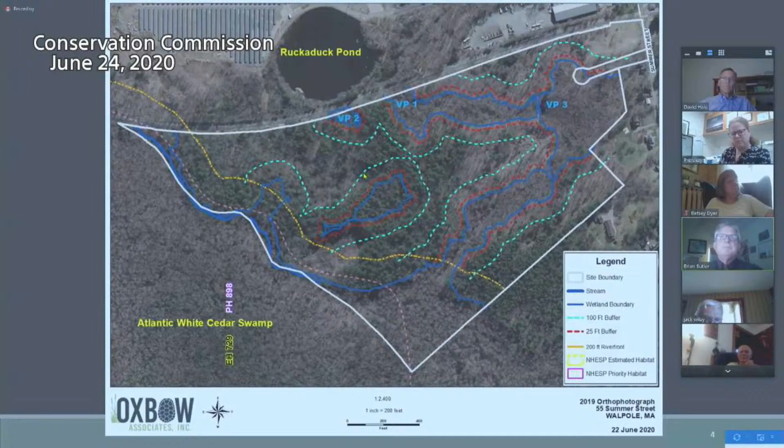The next two sheets are site plans. This was presented to the ZBA in the initial submittal, and you asked for the drawing box information—this is a March 4th, 2020 plan, sheet 1 of 1, proposed multifamily development for the record. We also have, in quick sequence, the same proposed multifamily development plan revised most recently 5/15 with color edits—original March 4th, revised May 15th, 2020, just so it's not confusing. I'll call your attention to a couple of things here.

As the comments have come in, first from the ZBA and then from Landis and the Commission in response to the ZBA's review of this, the project has been evolving a little bit out of phase, just because of some delays, but we've been tracking the commentary and trying to respond to that in a meaningful way on a number of aspects. I'll call your attention to a couple of features here.

If we look at the initial presentation plan, we had two sets of four units here. In response to commentary, we've retracted that and made it into a single set of buildings and displaced those.

Going back to the original submittal plan, the grading work and layout of these buildings has been modified to reduce the work in the 25-foot buffer zone and other resource area. We've made a number of plan changes of substance, and they continue to evolve as we go through the process, including a reduction of riverfront impacts that we've integrated into the most current design, and we've retracted from the majority of the 50-foot policy zone.

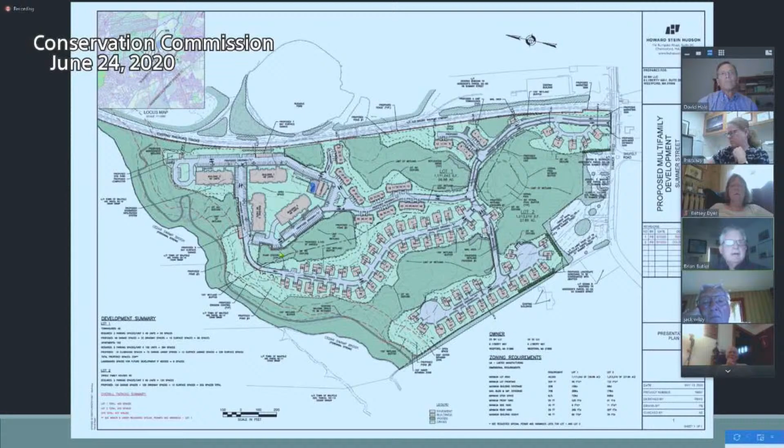There's a couple of minor incursions, and I'll show you those here on this plan, which is site plan 50-foot vernal pool exhibit, most recently revised 6/24. That's by Howard Stein Hudson.

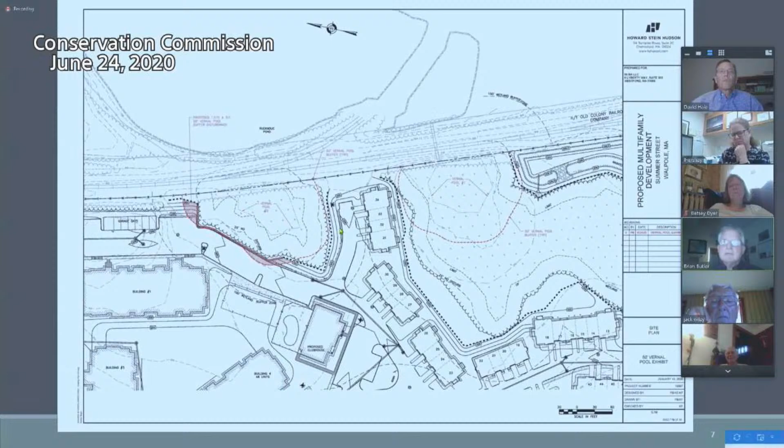You can see we have a small amount of grading here within the 50-foot to vernal pool number 2. This is the railroad track here that's recently been rehabilitated. So we have a little bit of grading here, a little bit of work here, and otherwise a small amount of work over here within the 50-foot represented by the red line. But we're largely keeping that 50-foot perimeter intact as was pre-existing condition.

I've put the MESA summary just on the front end here because it's very readily dealt with in Landis, and I think the commission members are aware. The habitat mapped for a portion of the site, north is up in this image, by the way. The habitat is represented, MESA habitat for priority habitat is purple, and it's coincident or co-occurring with estimated habitat, which is regulated under the Wetlands Act. And this is the perimeter. To the north is mapped habitat, to the south is not mapped habitat.

We submitted a MESA checklist to the Natural Heritage and Endangered Species Program with a specific inquiry as to whether the project as proposed, which was slightly amended, but the only thing that's changed really is retraction of the project further away from the estimated habitat, whether we would have an impact under 10.59 of the Wetlands Protection Act regulations, or whether we would affect a prohibited take under 10.02 of the Mass Endangered Species Act regulations. The letter came back, and there's a file copy, I believe, in the negative on both cases, which we anticipated.

The habitat is associated with Hessel's hairstreak, which is a butterfly with a specific affinity. The food plants are Atlantic white cedar. Our project is all beyond the 200-foot riverfront area, and the cedar swamp, even though the habitat is mapped partly on premises, the actual cedar habitat, populated by Atlantic white cedar, is remote even from that. Most of this area just off property and even on property is either hemlock forest enclosed here on the adjacent shore, or red maple and green ash and tupelo in the canopy over here.

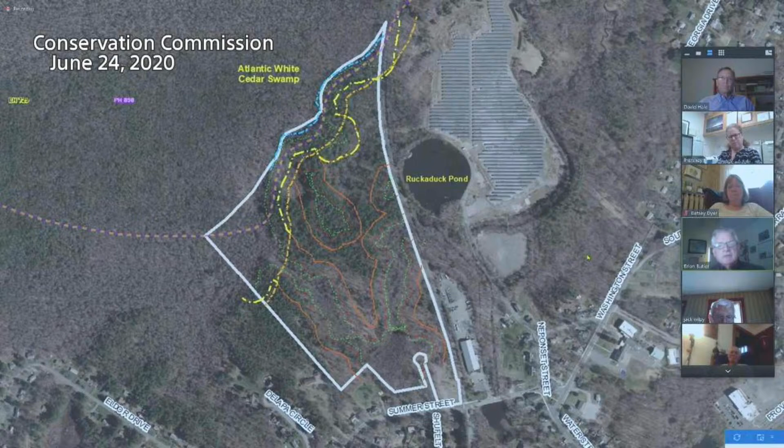It was probably all cut over for fence posts and shakes, 300, 200 years ago. And it's in the process of regrowth, the cedar swamp, but unfortunately when they regrow, they have to compete with maples for the first century or so. So this is not monotypic white cedar swamp that you see in some places that are more mature. In any case, we're over the hurdle of the Mass Endangered Species Act, except in so much as we decide to punch further into the north extent of this and maybe across our property line. I think that's a resolved issue that hopefully doesn't have to come back for discussion.

Riverfront is, of course, a prominent feature of the site because one of the borders, the northerly border, is Cedar Swamp Brook, or at least it was at one iteration. In the prior submittal, we had stormwater facilities that Patrick will talk about in a bit, proposed within the riverfront area in the outer river riparian zone, the 100 to 200 foot threshold. We also had a modest amount of grading for the dog park and compactor features back here in the northerly part, most northerly part of the development site.

In this plan, which is the proposed multifamily development grading and drainage plan, sheet 1 of 5, most recently revised June 17th, 2020, we've used a retaining wall, just to the left of my cursor. By using retaining there and a little grading modification, we pulled that out of the riverfront area, reducing discretionary work in the outer riverfront area limits by about 4,000 square feet, in part responding to Landis's comments.

Similarly, on the next sheet, grading and drainage plan sheet 2 of 5, most recently revised 6/17/20.

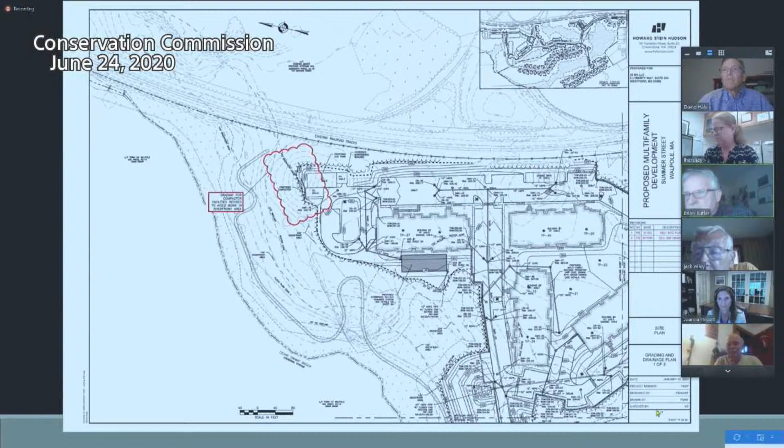For the record, Mr. Chairman, the references are sheet 17 of 88 for this sheet, and I believe sheet 18 of 88 for the second plan sheet 2. But we'll move on to more consistent material if that's okay.

I'd like to interrupt for a moment. My name is Al Getz, I'm a commission member, have been for 40 or more years. I did not receive a roll of 85 sheets on this project, so I'm looking at this on a laptop computer and it's very confusing at this point. I'm glad we don't have to vote on anything here tonight except to continue the hearing, because I'm not at all happy with what has been going on.

Just a comment from Al - this is one reason why I'm not a big fan of Zoom on a project like this, but we will continue with this. At some point we'll have to have an open hearing where people can comment and we can see what's being presented. So go ahead.

Can I just ask one more question? As far as procedures, everyone is referring to an 88 page plan set sent out today - by who? I think I said 88 pages. It was a very large set that appeared on my computer, and I printed out a couple of thumbnails of it. My set says there are 86 sheets.

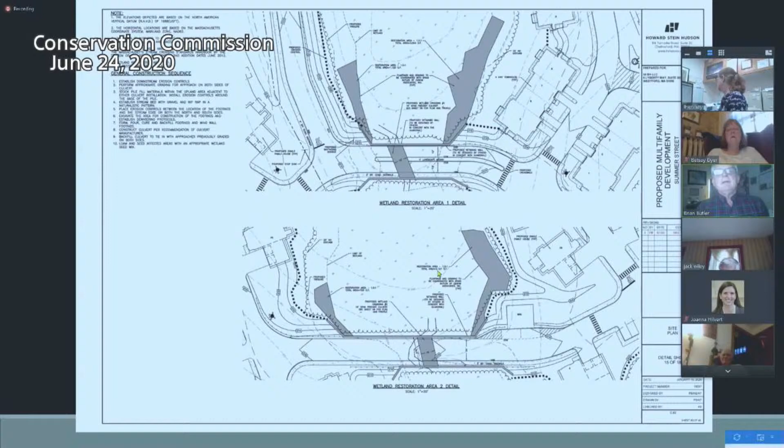As we go back to crossing 2, this is information that's contained in the line drawing, but some people like color and visuals of this nature - I certainly do. The existing stream is a little hook like this because there's a road coming through here, and that made for a very narrow constriction.

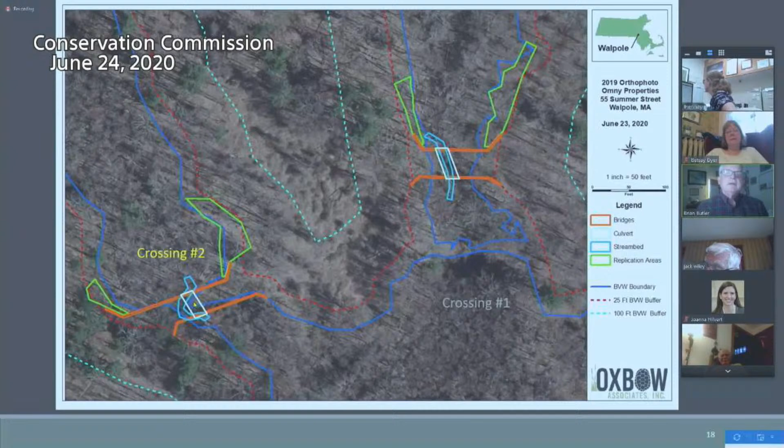The prior farmers and keepers of the land here manufactured this. The proposal is to basically straighten it, to go from A to B, as shown in the accompanying plan set, and remanufacture this bank, which again is subtle.

We've been discussing internally, we don't have a tremendous worry about erosion or loss of stability. The aggregate watershed here is 0.02 square miles for both of these crossings - a very, very limited watershed. There's no evidence of any velocity or scouring or any kind of hydrodynamics that would disrupt a manufactured bank here. So we feel good that we don't have to fight a torrent of water coming down afterwards.

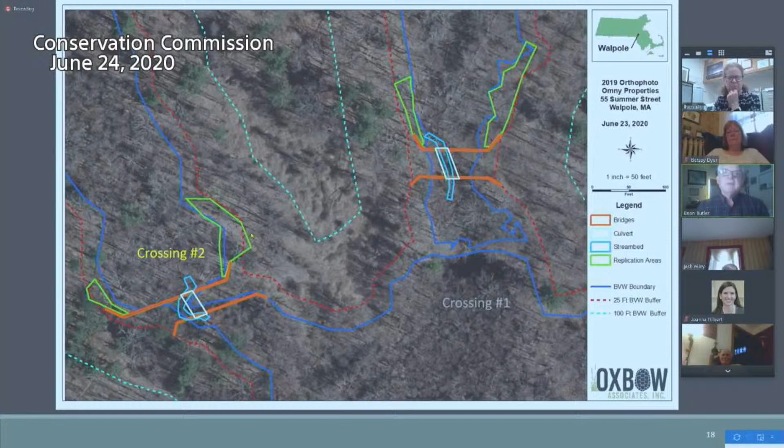Our plan is to go back to crossing 1 for both of these. There's a windrow that Landis has seen repeatedly out here, of softball-sized to cantaloupe-sized stones, in a long windrow along this shore of the bank. I assume there was probably pasture land in this part of the farm, and over many decades, whoever owned it was lumping those softball-sized rocks and piling them here. We're going to use those as natural stability elements in the remanufacture and stabilization of this bank.

So it's convenient - that material would have to be moved anyway, and it's already stockpiled in a very convenient fashion. I think I have a photograph of that just after this. This is the other bank at crossing 2, as you can see, this was in mid-March or late March.

I originally planned on doing the habitat assessment that we submitted on this day, but within the hour or so that I got there, it started snowing, and then it started snowing a lot, and then I couldn't see anything except white. But in between, you can see the limited water here. The flow through this system is very, very light, very seasonal - it went dry. The next visit I was there in early April, there was actually no flow. It's probably not even flowing today, except maybe in response to that downburst we got locally here.

This just shows you the promontory where the old road made a very discreet crossing into the upland over here, and we're taking advantage of the fill that was displaced there many years ago by some unknown farmer, using that to minimize our impacts.

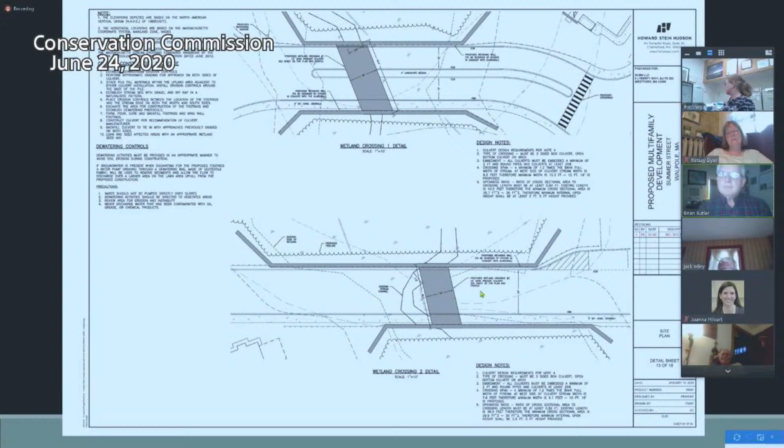Again, this is crossing 2. This is the workaround brook, manufactured brook that was used for a short crossing, and we're just going to straighten it out, take out the angle there.

And this is post-facto imagery. Instead of having a wraparound channel here, we're straightening it out and going to manufacture it with the on-site cobbles. As with any stream, there's usually a threat of potential washouts, but I can't imagine an event that would put more than a very limited flow through here, and we'll certainly try to accommodate any worst case scenario until it's well stabilized.

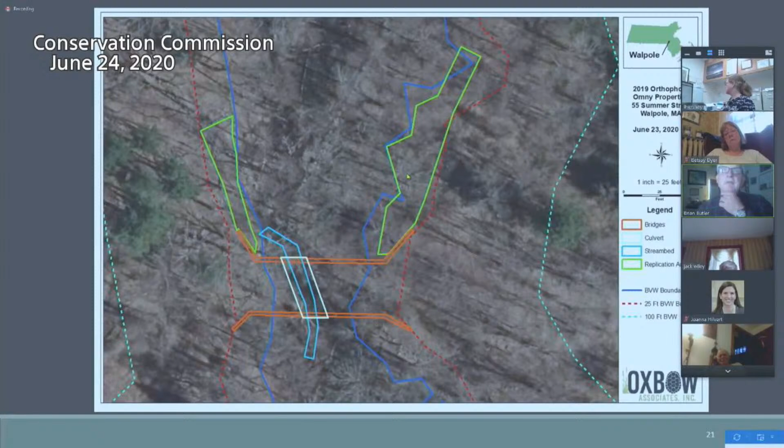The replication areas are shown in green here. This is just a replication of the line drawings already on file with you, which we've already looked at. This is also in the plan set, sheet 82 of 86, revised 5/1/20, detail sheet 14 of 18.

This is just a cross-sectional view of the proposed culverts, looking at the roadbed here. These are footings to support the drop-in box culvert sections. As we see, there'll be a 14-foot span where the bank now is 8 feet or less, and there'll be 5 feet of headroom.

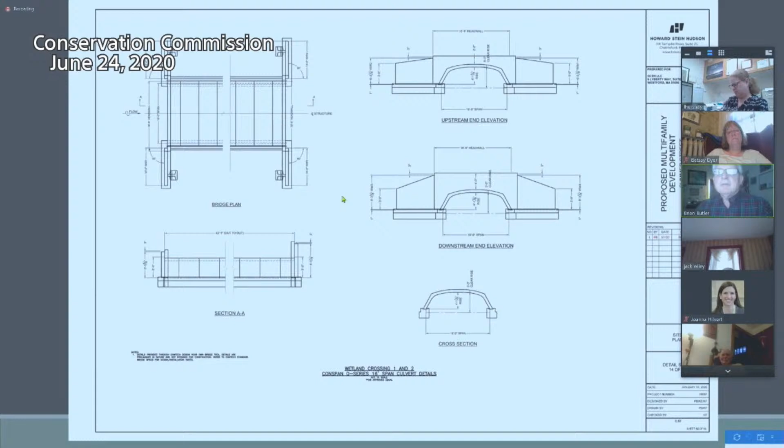So that's two things: it encourages wildlife movement by small mammals, reptiles, amphibians. It also allows, if you ever have to get in there to do repairs, you don't have to be on your belly in a confined space—there's actual room to maneuver within the culvert enclosed space. And these are the cobbles I was just mentioning here.

Landis, I think, has seen these. The windrow goes from here all the way off screen, so we have no shortage of supply of pre-collected stone that we're going to use to embellish anywhere needed—the remanufactured and reinforced stream on crossing 1 that won't really be manipulated in any way except embellished with a little bit of stone on the outer banks.

We've discussed the vernal pools tangentially earlier on. We knew this was a vernal pool from some time back. There was a 2005 ANRAD that identified these 3 bodies, as well as off-site bodies, as potential vernal pools. We investigated these in the spring of this year, and we've collected enough data to certify all 3 bodies.

The applicants are certainly willing to do so as a condition of the recording of our order of conditions. We'll submit, on or before that date, certification documents—the observations are good for 3 years. This is a fairly dynamic and persistent pool.

Vernal Pool 3, as I said, is held up by an old cart road. It has spotted salamanders, wood frogs, fairy shrimp, and several mollusk species—planorbid snails and caddisflies, dytiscid beetles—the whole litany of standard vernal pool fauna.

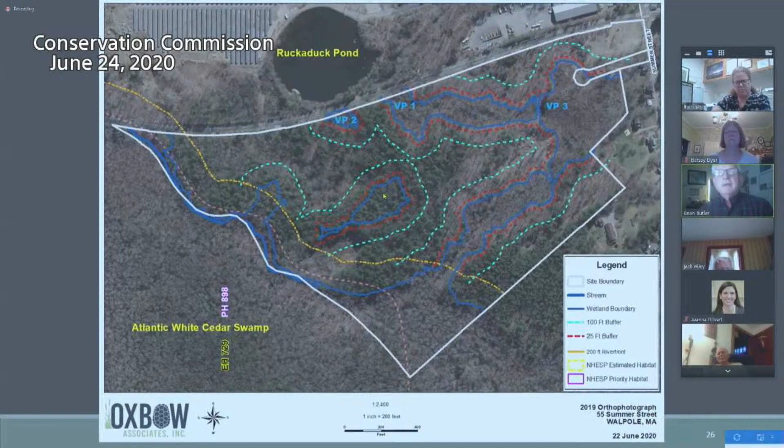So we've treated them all with a buffer zone. This has a regulatory buffer zone. This has a voluntary buffer zone to some extent. It's more of a federal jurisdictional wetland. And we're not working in any of the floodplain that's not shown here, but it's kind of partially overlapping with Vernal Pool 1 here. So those are the 3 vernal pools. Like I said, we've identified them, we've scrutinized them, we've collected enough data to put them on the map as certified vernal pools at some point in the future.

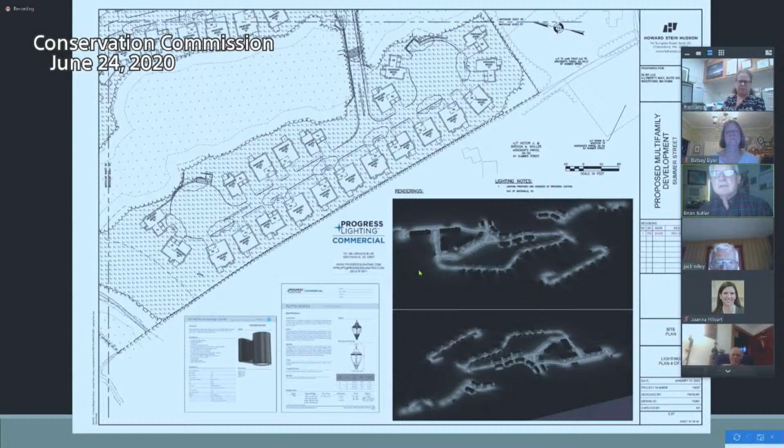And finally, we get to stormwater design, where I will take a break and ask Patrick to give you just a flyover summary. We're not going to read the HydroCAD sheets to you here tonight, but Patrick is going to explain just the approach and the layout of the facilities, how we arrived at where we are.

As I said earlier, the only activities proposed currently within the riverfront area, exclusively in the outer portion, the outer 100 feet, are the stormwater facilities, as allowed by the regulations at 10.58. Stormwater is the only impact to riverfront area that we propose in the whole project.

And Patrick, if you could step up, I can't see him on my, oh, there we go. Can you hear me? I can, Patrick, yeah. I guess I have to work the controls there, right? Which is not. Can you go to the next sheet for me?

All right, sweet. So the stormwater here is designed to follow mainly the natural flow of the property as it's laid out, and the site itself was laid out in a very similar manner. So the majority of the flow comes from Summer Street, on the southern end of the property, to Cedar Swamp Brook on the northern end of the property.

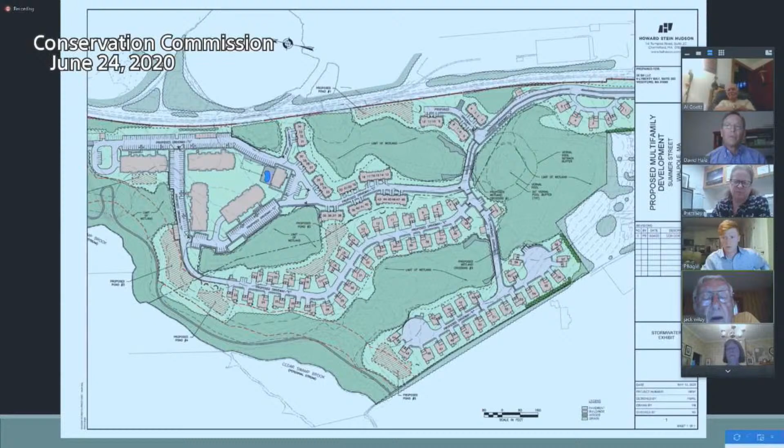Okay, let's continue on. I understand what Al's saying. It's not easy to follow it when you're looking at a laptop or similar device. But understanding that this is an informational meeting, we will not be voting on anything based on this presentation. So I think we are getting an overview of the project, which gives us a little more information than what we had before, but it certainly is not the best situation to have to deal with it on Zoom. But anyhow, do you have anything more that you want to present?

No, actually, we don't. That was pretty much the end of our presentation, and it was, as you said, Mr. Chairman, the intent here was just to give an overview. We're not asking anyone to vote or close this hearing or make any definitive decisions on the project in any way whatsoever. We're just trying to get so that we're all speaking from the same hymnal on the project as we go forward. The nitty gritty and the details and the nuances will be elucidated through the peer review process and then through scrutiny. The peer reviewer will be providing counsel to your commission, and that's when I think we can get into the nitty gritty and the detail oriented stuff. This was just intended to convey some of our thought process and the approach and where we've come in the 13 or 14 months that we've had some contact with this commission off and on for various aspects of the project. Okay.

You have completed your presentation for this evening? Yes. Okay, Landis, did you want to make any comment at this point?

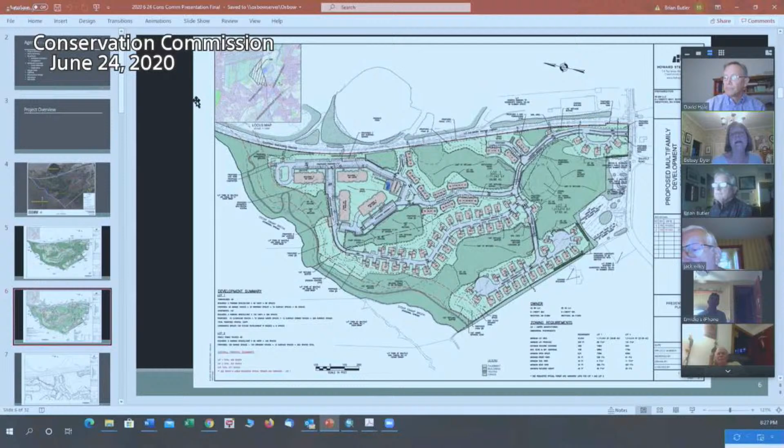All right, so be that. And then just a couple of little quibbles, 3 little quibbles. We tend to call them detention basins; you're calling them ponds, and pond just doesn't fit. They're supposed to drain, and drain pretty promptly. You're not supposed to have a pond in your backyard, although people won't even enjoy having it for 24, 48, or 72 hours, I think.

And then I noticed on one of your plans, I think it was the 10th or 11th one in, you were calling it the open space recreation plan. That means something in Walpole. We go through a whole lot with open space and projects, and we've got some opinions on those over the years. I don't think there's a whole lot of open space here. I see one little thing labeled open space next to the pool, and another little thing labeled open space. It doesn't really have the feel of true open space. You've got a lot of wetlands, and then you're allowing just a few little light green areas.

And then finally, the intermittent streams, in my opinion, should be on the plan. They should be labeled as intermittent streams, and I didn't see them, at least the ones I happened to look at carefully. Maybe they're somewhere. So that's it from me for now.

Thanks, Betsy. Al, any comments right now? My comment is still the same. I want to see a set of plans because I can't evaluate from 8 by 10 on my wife's laptop computer. Right, understood, that doesn't work.

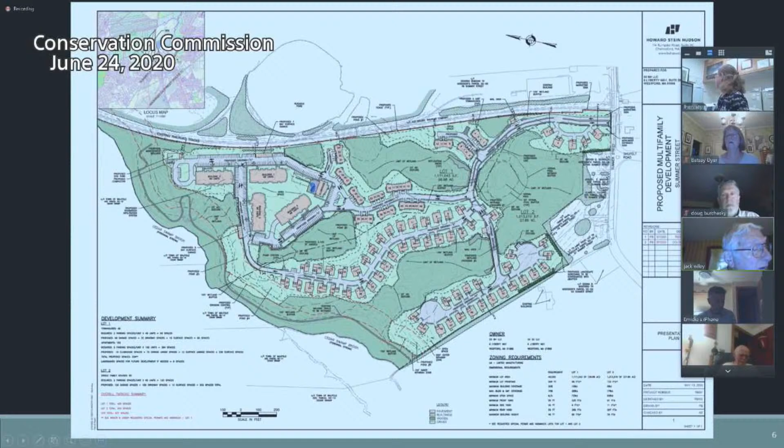Thank you for your presentation. I think we still have some more things on our agenda, don't we? Yeah, there's a certificate of compliance. Okay, all right, where are we?

Will, thank you for your time then. I think you can bail out. You may, or you can stay and listen to our scintillating conversations that go on about the rest of the meeting. So, next on our agenda. Okay, thanks all, thank you.

We have minutes from June 10th. Someone want to move those minutes? Somebody want to move them? That was Betsy moving. Do we have a second?

Second. Okay, all in favor, Doug? Aye. Emilio? Aye. Betsy? Aye. Al? Aye. I abstain, I wasn't there. Okay, so that's that. Minutes.

We have a certificate of compliance for Northwood Drive. Is that okay, Landis? Yes, that was for a septic system that was redone, all set. Okay, so want to move that? I will move it. Betsy, do we have a second?

Second. Okay, all in favor. Doug? Just a quick question, what was the address again? 6 Norwood... Northwood, sorry, number 6 Northwood.